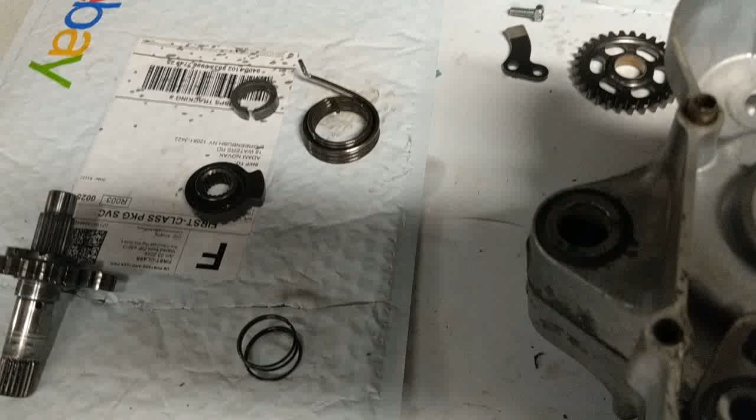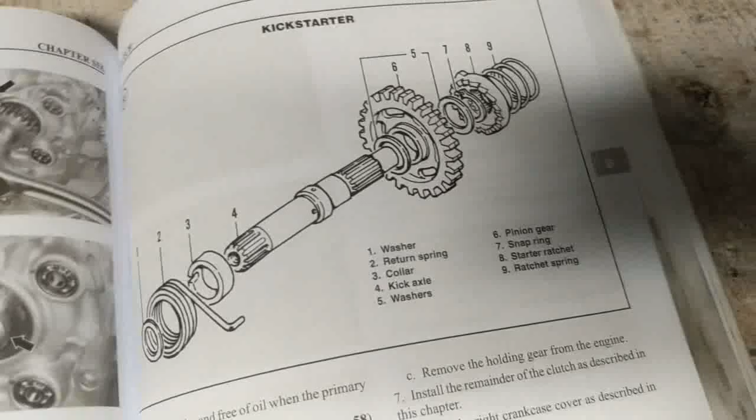Okay, we're going to start putting our Kickstarter assembly together. I think I mentioned this before, but I'm using the Clymer manual. This is good for 98 to 2002. They're all pretty close. There are some differences, so just keep an eye out for little things. But that's our Kickstarter assembly.

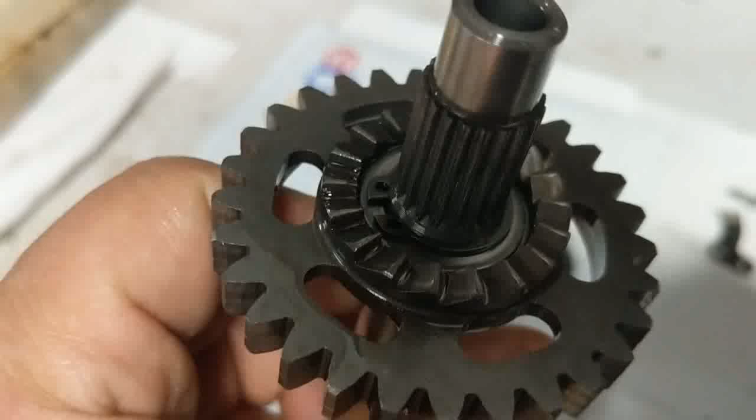This guy here, it's got a snap ring right there, and then it's got a washer, then it's got the gear, and then another washer. I had no reason to take that apart, so that's still all together. So your spring's going to go first, and then your starter ratchet, and then again that snap ring, washer, gear, and next washer, they're all already together.

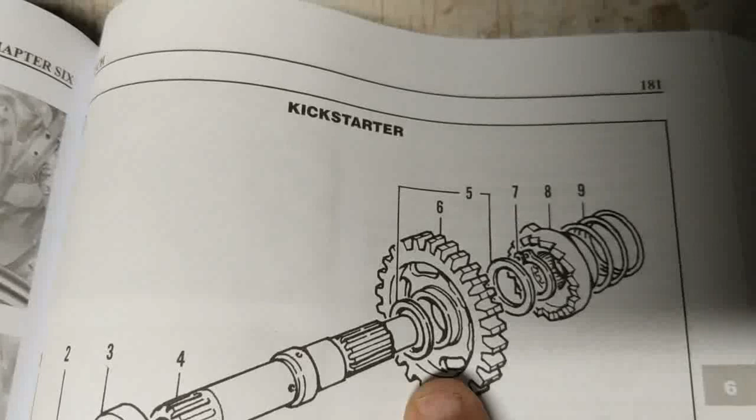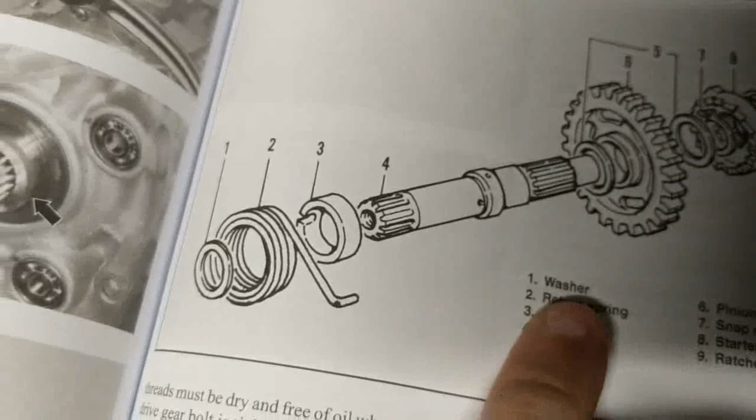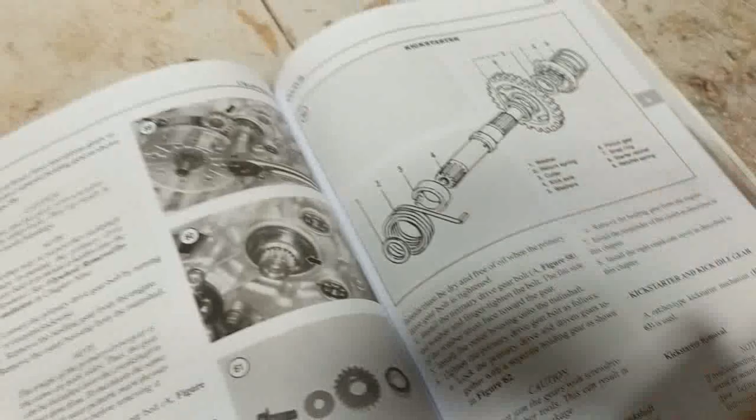Then on the other end, you're going to have number 3, which is a collar, 2 is your spring, of course, and then you should have another washer. And if you're watching the other videos I have on this, whoever was in here before, I know I probably said this 3 times already, but they did not do a very professional job at all. I already had to buy 3 thrust washers, and now it looks like I may have missed this guy too. So I got to see. It may be in my bag of tricks still in the box. But anyhow, going to start.

We're going to install this guy here. He just goes back in there, and you got a bolt, get that guy in there first, and then we can start setting our spring and other pieces. Okay, so now we can go ahead and get this guy lined up. You should have a couple marks on here. Let's see if that'll focus. Right there you should see a little dot, and somewhere in this guy, it looks like right there, you're going to have another dot. Make sure you line them up.

You'll be able to tell if you're one tooth off either way. It's pretty significant, so you'll know that you're lined up. But that's important. If not, you'll have problems when you're going to kickstart, and then you'll be taking it back apart. So now take your spring, set it in here. Got this guy bolted in already.

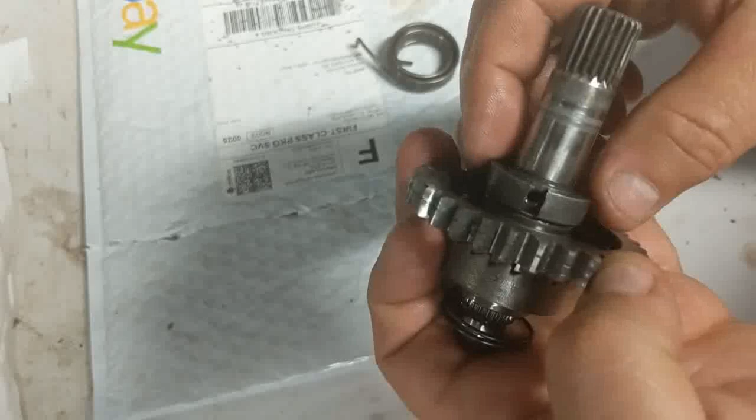Okay, one thing I want to point out when you're putting your kicker back together, once you get this all together and you're setting this down in place, be very careful that this guy here that we lined up the 2 dots with, make sure as you're putting it in, it gets a little tricky and it's going to slide out of your hands. Make sure that it doesn't kick over one tooth either way, or you'll definitely have some issues.

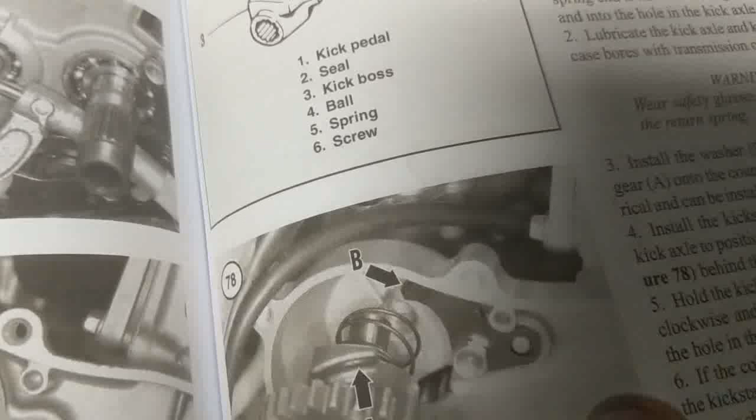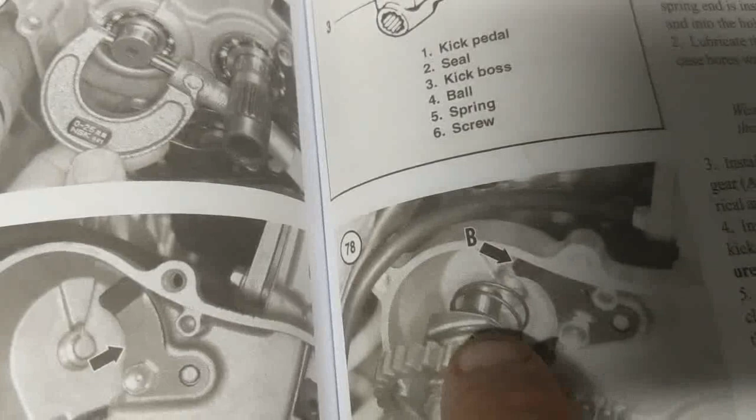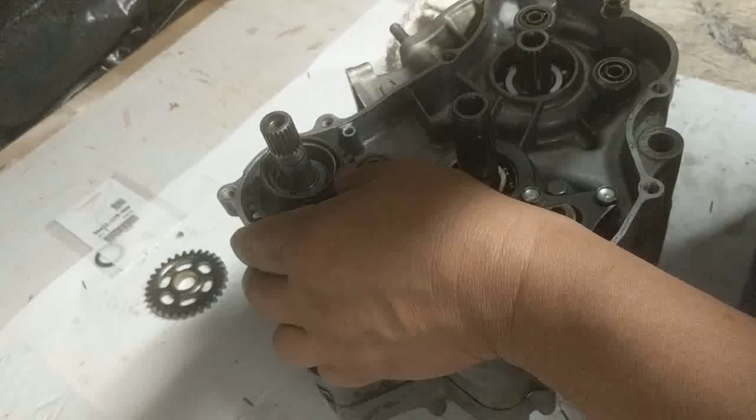And the other thing you want to be sure of as you're setting it in place, your kick guide right here, as you're setting this down into the hole, you can see that little lever right there, for lack of a better term, where that comes to a point right there. That has to get underneath that kick guide once you set it down in. Then you'll know you're in your proper place, and then you can go ahead and tension up your spring. I'm going to take this spring and wrap it around, and it's going to set in this hole right here. Make sure that guy spins freely once you get everything in place.

Okay, we're going to go ahead and install our idler gear now. First we have to install our washer. This is one of the new ones I had to end up getting. And then just take your gear and slide that on there. This gear is identical on both sides, so not an issue whatever way you want to put it. That's it.

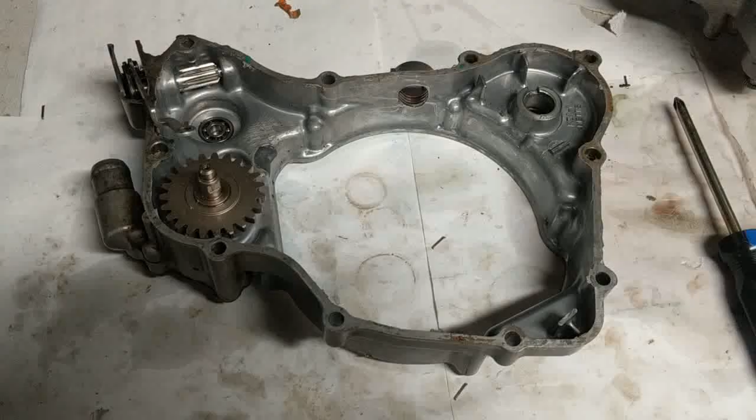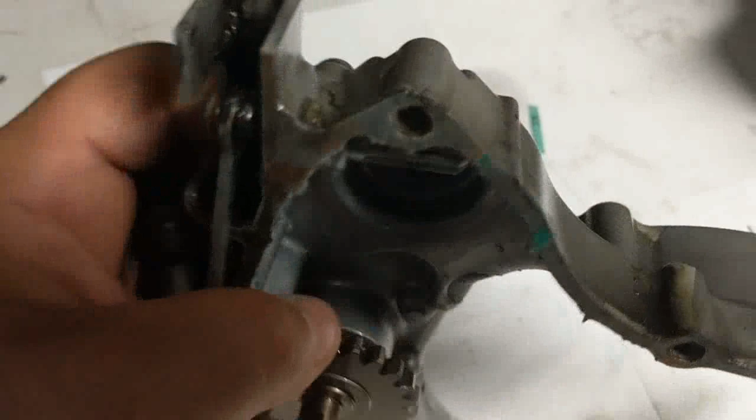Okay, so our next step, we're going to get our outer case on. So what I'm going to do first is take this guy out and just clean it up, make sure there's nothing in there that's going to bind it up. Doesn't appear that there will be. It's pretty free as I spin that, but you should check it. Maybe put a little bit of oil on it. Basically going to remove that Phillips screw, and then that should slide right out, and clean it up.

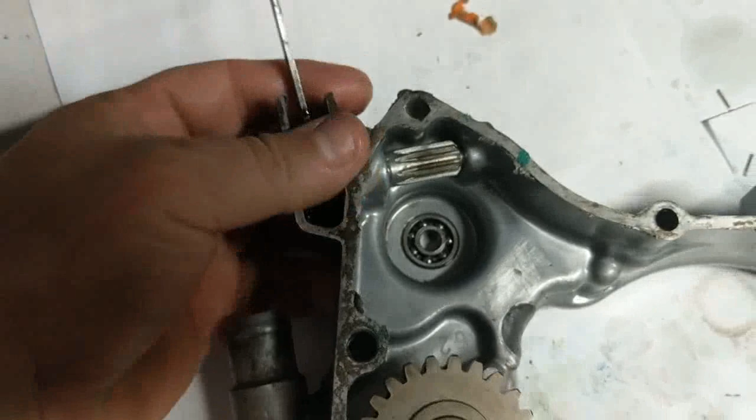As always, pay attention to your orientation. That's the way the arm has to go back in, with the little notch going to the right. So we're going to go ahead and do that. Going to check these bearings, lube these bearings up, clean up a little bit of the old gasket material, and then start putting this guy back together.

Okay, one of the other things we have to do is we're going to have to break down this water pump a little bit further, because there are some seals behind here that come with the kit that should be changed. And they're pretty important because they keep things from getting mixed up, your oil and your water, your coolant, which will obviously cause you problems. So I don't recommend skipping that step.

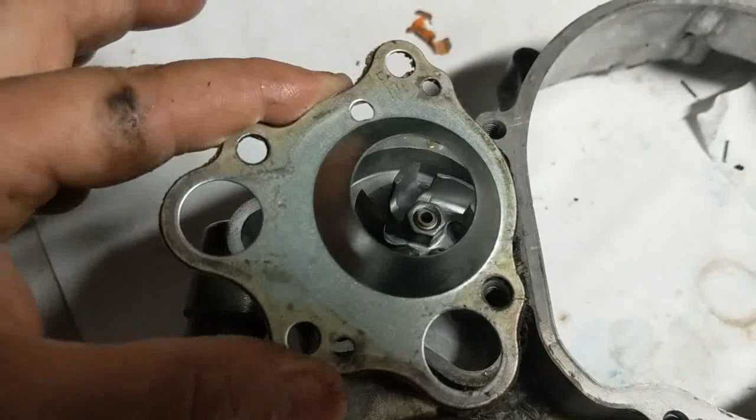I would love just to start reassembling right now, but for a couple of $5 seals, you don't want to leave it like that. So you're going to take this top plate off, and then right here you're going to remove the impeller. That's not a nut, it's actually part of the impeller. In fact, that's not as smooth as I would like, so I'm going to check that out when I have it open. But yes, there's a couple of seals behind here, so you're going to want to replace them.

Pay attention to the orientation of the seals. Make sure that you put the new ones in the proper way, because they are different on each side. Can't really see it, but yeah, I guess maybe you can see that. That's one of the seals there, but I believe there's two in there once you get this apart. This gear will pull out once you get this impeller off.

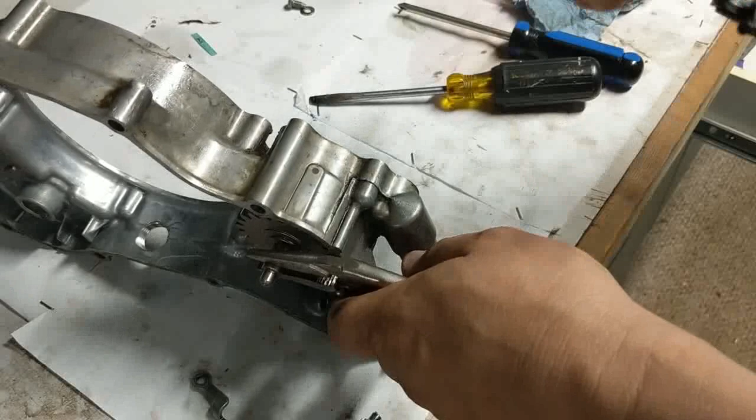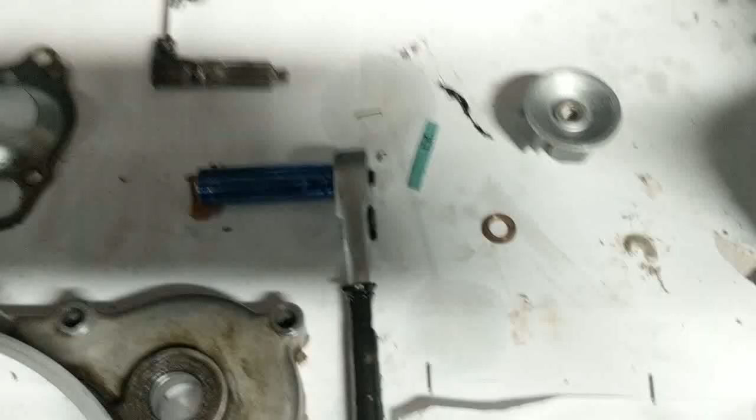There's a couple flat spots on this gear spindle. I'm just using a pair of needle nose vice grips. Don't go overboard with it. You don't want to mar that up, but give yourself something to hold on to. Then you're going to take your 10mm socket and get on the front of that impeller, and that should loosen up for you. Okay, so we got the impeller off.

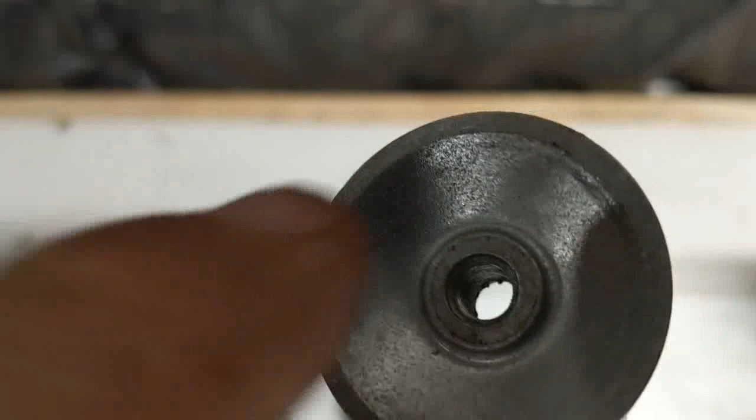There's a better look at it. Like I said, it's actually not a nut, that's part of the impeller. And just a little bit of a warning, this comes off kind of hard, so don't expect it to spin off real easily. Though I don't see any residual Loctite. It almost felt like it had Loctite on there, but I've got to check the book to see if it calls for Loctite. It didn't come off exactly easy, but once it broke free, then it wasn't bad.

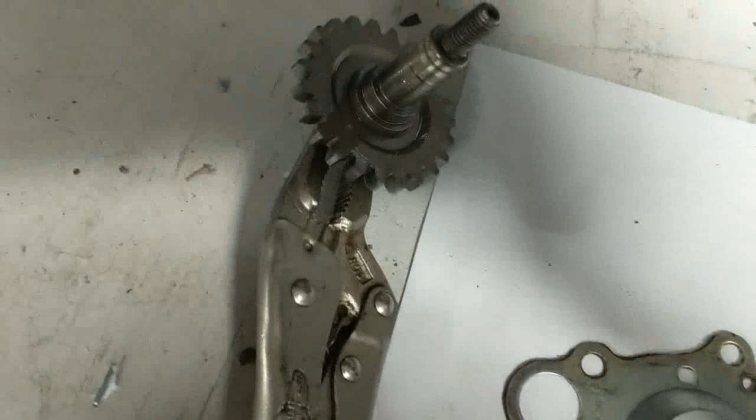Behind that is a washer, so keep an eye out for that guy. And then your gear. And now there's a look at our seals. I'm going to check on my kit, but I'm certain that they're in there. I believe there's one here and one behind it.

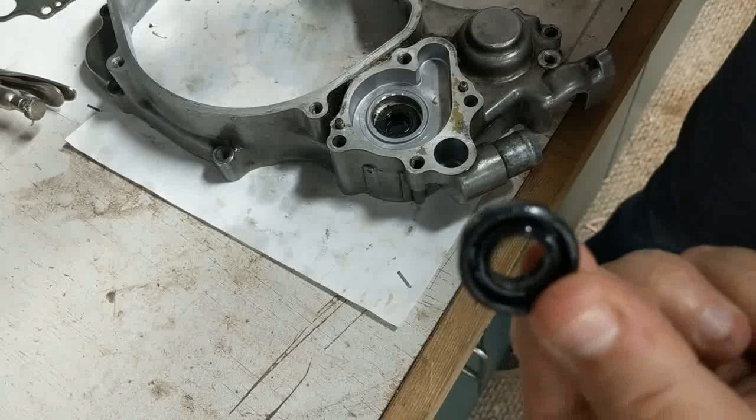Okay, so there's your two seals. They're two different sizes. The bigger one is the first one I took out, and the smaller one is obviously the second one I took out. And this one here, I'll call this the open end for lack of a better term. This is the end where you can stick something in there if you wanted to. That open end on the smaller one goes down, and then the larger one, the open end faces upwards.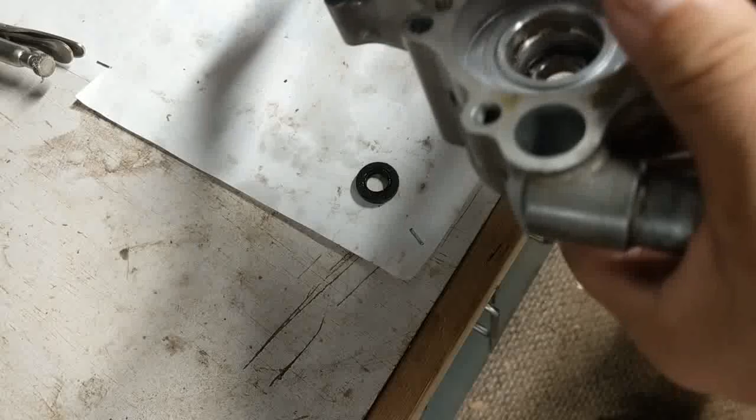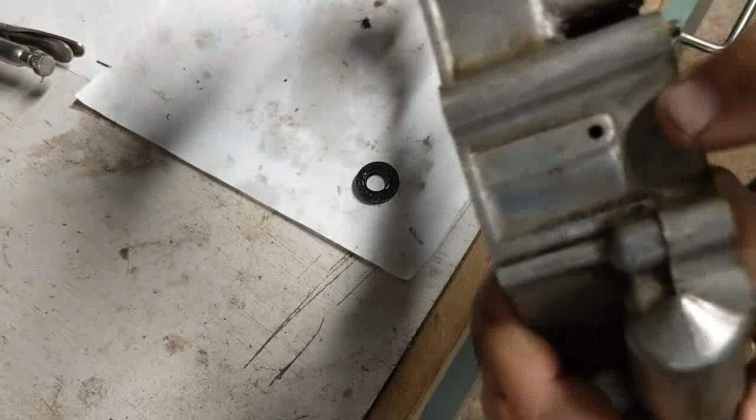Something else I discovered on this, and I didn't see this in the book, I didn't necessarily look for it either. But if you can see right where I'm pointing with the screwdriver, you probably can't, but there's a hole in the race where the seal goes, and if you look on the outside here, there's also a hole, and I was curious to see if that went all the way through.

So I got a bread tie, and from the outside it was plugged with dirt solid. It almost looked like it was sealed with putty or something, but it was actually just dirt. But as you can see now, I can push that all the way through and you can see it coming out. So I would clean that out.

I don't know if that's a weep hole if the seals go bad, or that might even be a weep hole for the water pump. I know on cars they actually have a weep hole, and that lets you know that the water pump's going bad. So I'm assuming that's what it is. I'm going to look in the book, but figured I'd mention that.

Okay, so we got our first seal in, and just take a look at how I have this case orientated. I'm working from this end, so your first seal goes with the, again, I'm calling it the open part facing down, so this flat side you're looking at, and now your next seal, your bigger one, the open end is going to face you. So in other words, the flat side and the flat side are basically going to be touching each other. And this slotted end or open end will be facing towards you. And this one here is facing away from you.

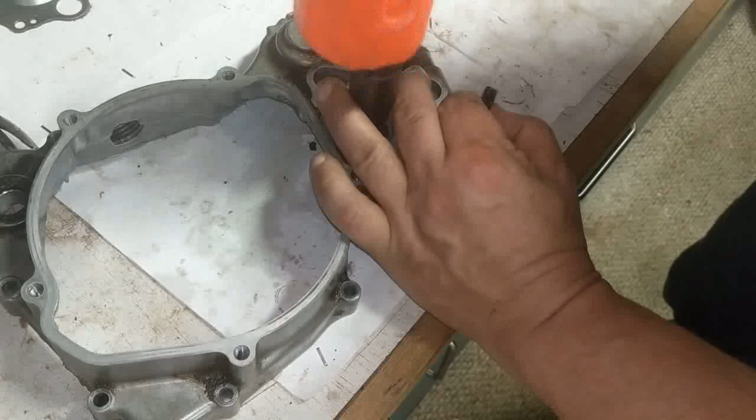Just make sure that's set in there all the way. I already drove it in there with the socket, but just double checking it. That one there pushed in pretty easy. Be careful when you try to drive this one in here, because the way it's facing, there's like a metal spring that's inside of these, so just be delicate with it. This one actually, it's set in there pretty much all the way, so I'm just going to give it a couple taps.

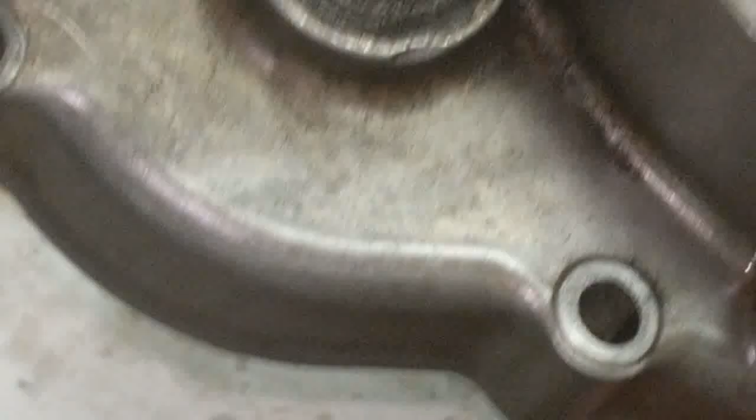Okay, so you should only have one seal left, and that's going to be the seal for the Kickstarter. This is going to be like most of your seals would go, with the flat side facing out.

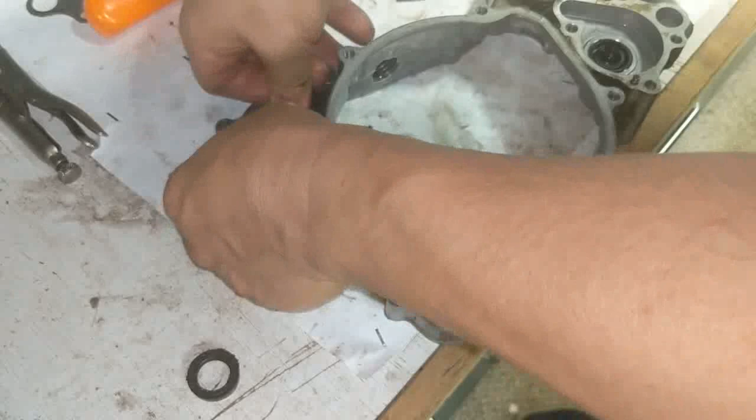Okay, we're going to start putting our water pump back together. Make sure you put your new gaskets on. Make sure you get the old gasket off, obviously. Make sure you got a clean surface. Just putting a little grease on here to give the gasket something to grab to.

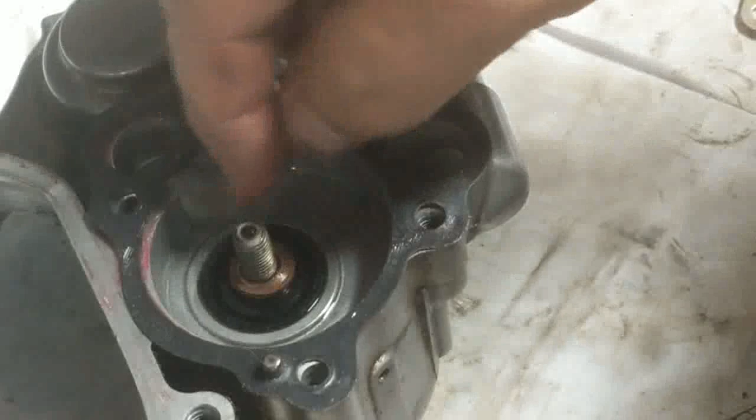Okay, so you got your first gasket on, you got your impeller on. Make sure you get your washer on before you put the impeller on. I used a little bit of a medium strength Loctite, and the book calls for, I just saw the spec somewhere. No, I don't see it right this second, but it's in the book. It's by inch pound, so I did it by feel.

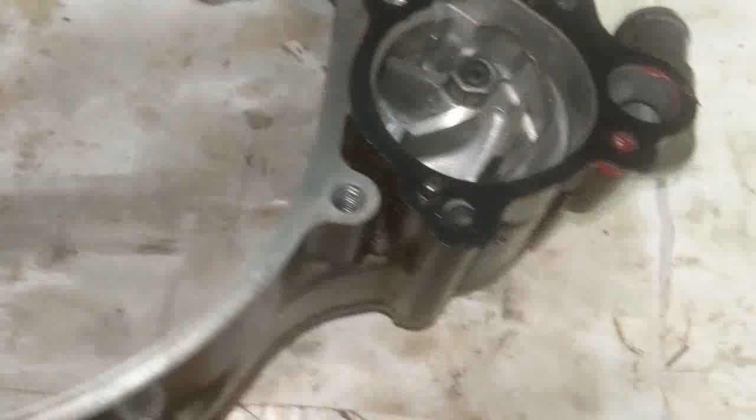I just got it tight and gave it a little bit more because I don't have anything that goes down to inch pounds. But I don't recommend going really tight with it because it is an impeller and it has to move freely. So I use a little bit of medium strength Loctite on it. I didn't use a lot, just enough to make me feel better that it's not going to loosen up. So you got your first gasket on. We're going to take this guy here.

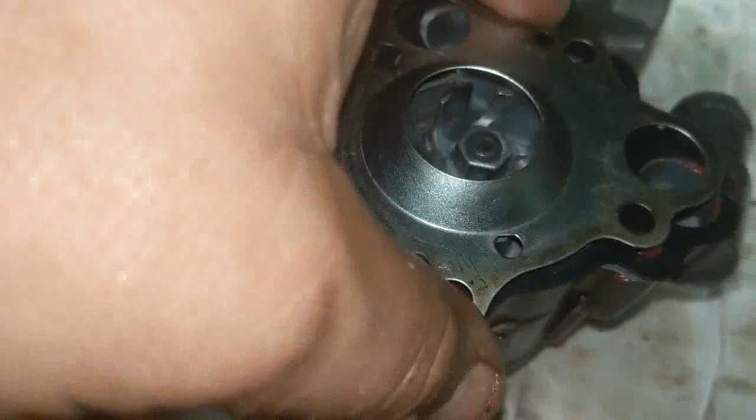Line up your dowel pins. Got one there, one there. That guy should fall in place and it should look like that. Then you got your next gasket, and then after that you got your cover. Okay, so once you got your second gasket on, go ahead and place your cover in place.

You got 4 bolts for the cover. The 2 longer ones are going to go in afterwards once we get the case back on the motor, but for now you can get your 2 smaller ones started. Just make sure you're putting them in the right spot. This hole here and this hole here is obviously for the longer ones. So you're going to want to put your short ones, one there and one there.

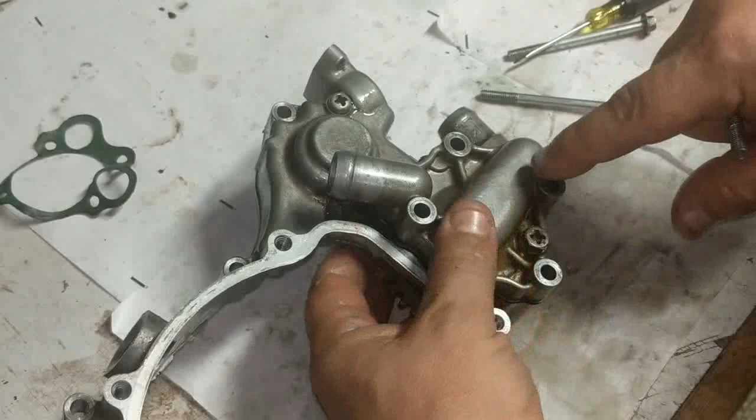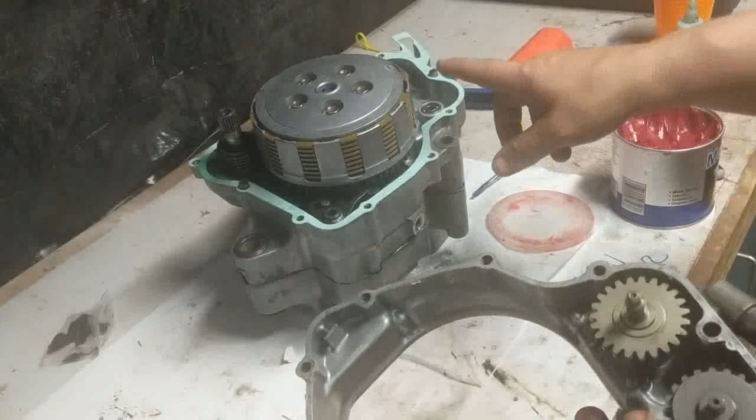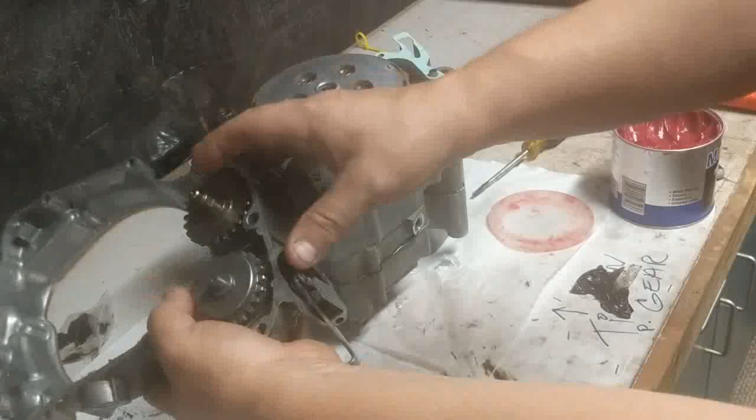Okay, so now you go ahead and you put your governor gear in place. Just drop it in, it'll fall in place. Make sure your arm here is lined up correctly, and at this point we have our gasket laying in place. Use a little bit of grease to hold it down. Now we're going to take our water pump gear and our governor gear. Where am I? And we're going to try to get that to fall into place into these 2 bearings. And then once you get it in place, you can start putting your bolts in and bolting it down.

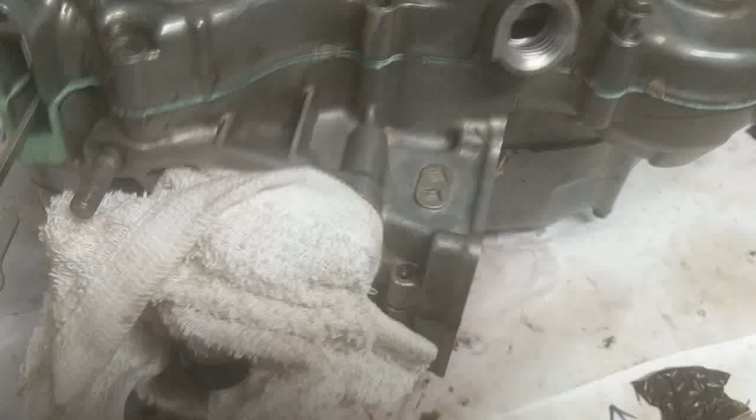Okay, so once you get your case in place, just double check, make sure your gasket's even all the way around. Make sure your governor's good, make sure that's moving. And now you're ready to start placing the bolts in, going all the way around, and you can go ahead and secure that. Also at this point, as you're putting this cover on, you can also put your 2 long water pump bolts in.

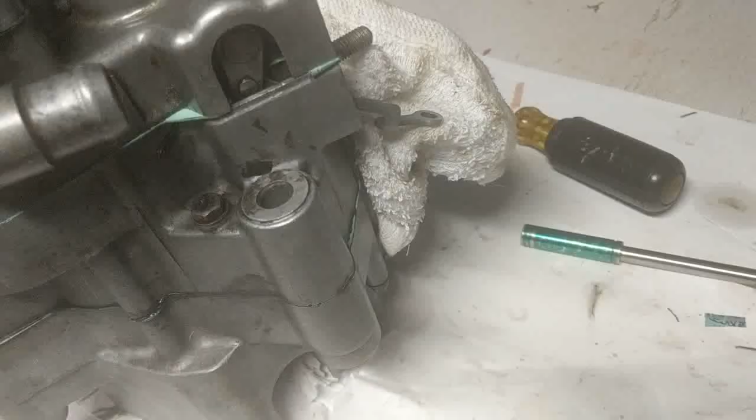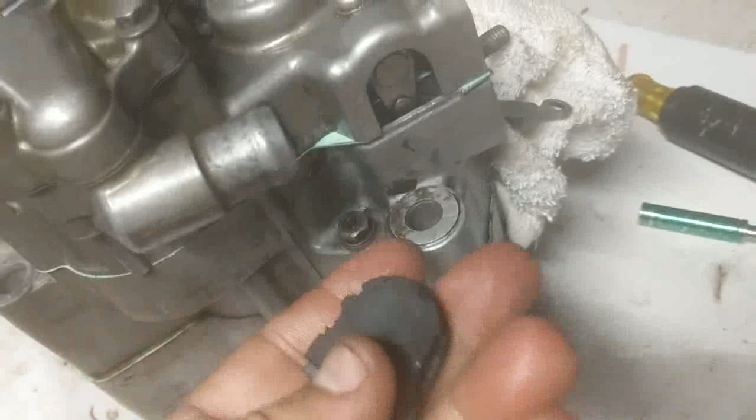Okay, also wanted to point out that where your power valve arm is, there's a rubber cover that goes in here, and it's best to slide it in place before you put these together. I didn't, only because I didn't realize what tough shape mine was in. I don't know if you can see that, but the inside's all chewed up, and basically when I slide mine in and I put the cases on, because there's nothing to grab on the back side of this, it just keeps popping out. It's in really tough shape.

So anyhow, I'm going to order a new one. You can get them in afterwards. You just have to kind of be careful. You got to take a small screwdriver and kind of press it in, and then it'll eventually pop in. So I'll get that in afterwards. I just want to point that out.

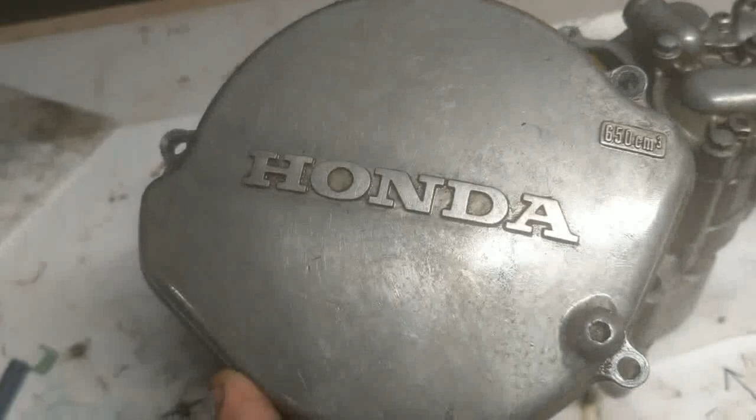I got all the bolts tightened on the case now. Again, I didn't use a torque wrench on these because it's a real low setting. I just tighten them up until they feel snug, give it a little extra, if you will, and call it a day. If you got the proper torque wrench, I definitely recommend it. I pretty much torqued everything down to spec on this except for the smaller stuff, because my torque wrench doesn't go down that low. So yeah, we're going to go ahead and put our clutch cover on now and bolt that down. Same thing, snug them, give them a little extra turn, and should be good to go.

Also want to mention real quick too, make sure you put a new gasket on your clutch cover. Mine's brand new because before we ended up with this bottom end problem, I actually put new clutch plates in, and I put a new gasket in then. So this one's brand new. But if yours was old, definitely put a new one in if it came with the kit. If it didn't, I recommend ordering one separately.

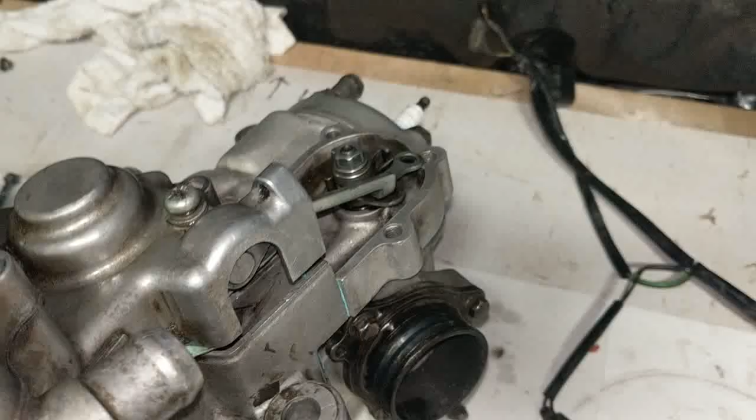I want to point something out on this power valve assembly. I had problems with this in the past when the motor originally locked up, getting this thing back in time. And I'm not sure that timed is the proper term, but this is your power valve assembly. That's how much play you have in it. So when you get this all back together, you have to get this linkage back on that stud right there. And as you can see, I'm too high. And if I move the power valve, I'm way too high. And there's a little spacer that goes on, and then there's a cotter key, but that's in the bag over here.

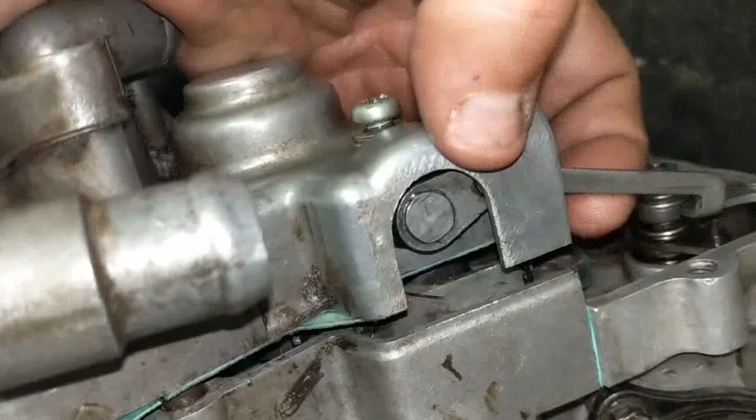So here's the issue. When you're looking at this view here, if you don't have this arm in the proper place, it's not going to line up. And in order to fix that, you have to have this whole side casing off, not the main cases that you have to split, just this side case. So I'm going to go ahead and do that now, and I'll show you the position that it's actually supposed to be in. I'm off like 1.

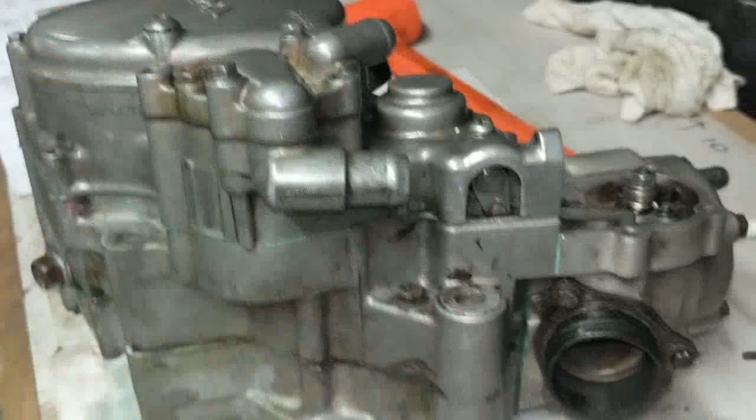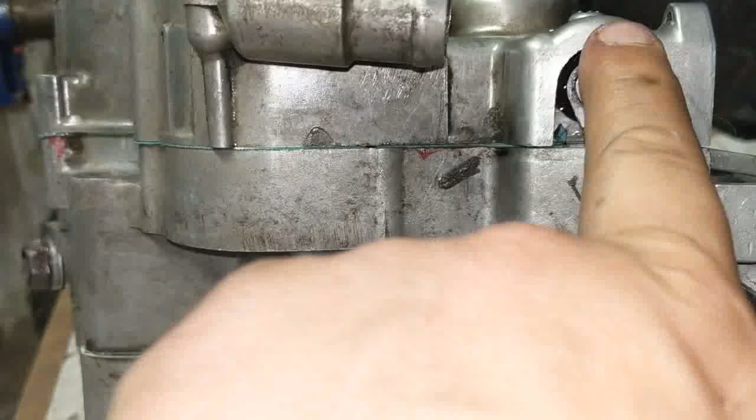Okay, so looking at your motor in this direction, just for a reference, there's your water pump. So when you're looking at it like that, your power valve assembly, this guy right here, should be a little bit at an angle. It shouldn't be perfectly straight up and down in the middle. It definitely shouldn't be this way. It should be a little bit this way, to the right as you're facing it, as you can see there.

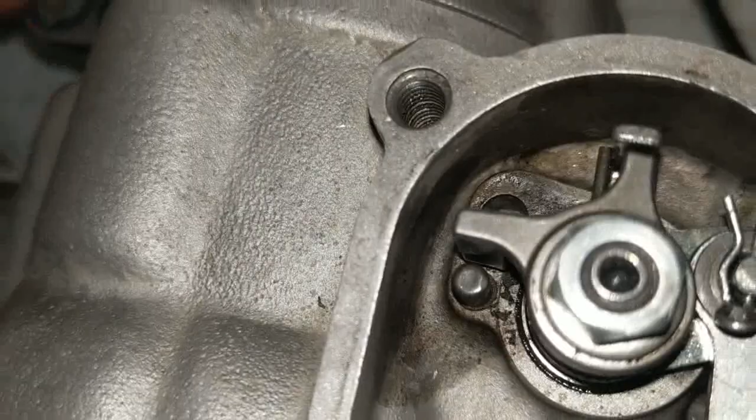You'll know you have it in the right spot because once you do, that pin right here, this arm has to be setting against it, just like it is. There might be a very slight gap there, but if you look close enough, it's actually setting against it. If you have it in the wrong spot, it could be just off of that by 1/8 of an inch, but it's enough where it's going to mess you up.

You should be able to very easily put your arm in place, put your spacer in there, and then put your cotter key in there. And that's the position the cotter key has to be. It should look like, well, yep, there we go.